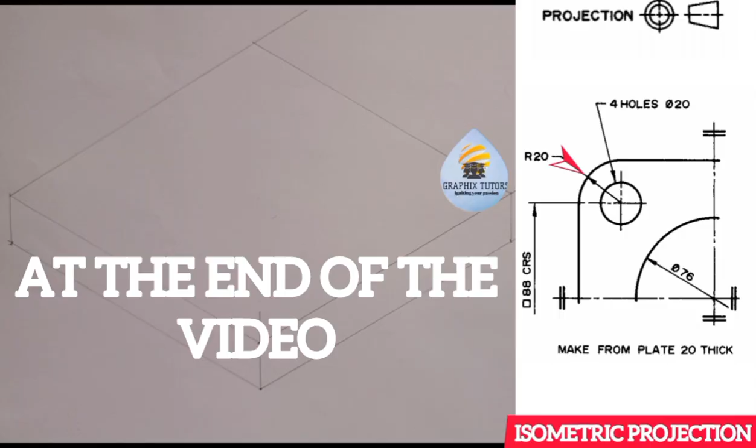My name is Graphics. If you look at the right hand side of the screen, you see a figure, and we are told to reproduce the given figure in isometric projection.

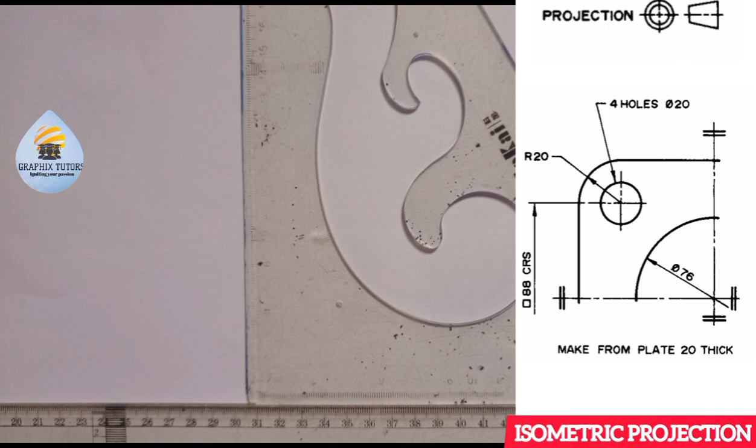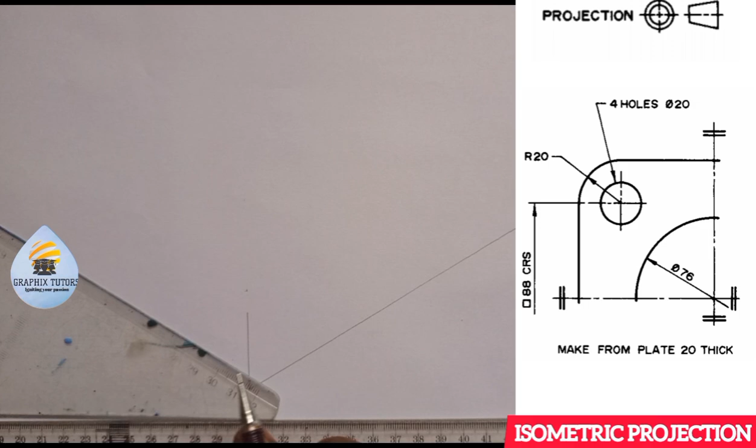Now when you hear the word isometric projection, the first thing you have to do is draw your isometric axis, that is the Y, the X, and the Z axis. Can you see that? Y, X, and Z.

Is that taken? Now if you look closely at the figure, we need to get the length and the width. This symbol you see here, like a center line at this end and at this end, means that this object is symmetrical in all directions. So it means that this figure is also placed here, also placed here, and also placed here.

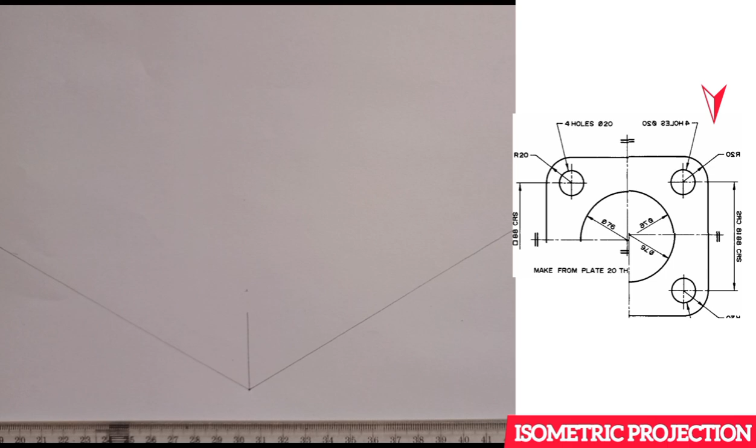I will put them together now, so they only give us one quadrant of it, one part of it. Is that taken, one-fourth of it? So this is one-fourth of it, and there are four in number that are assembled together.

So if you look at this now, whatever I'm looking at, I will assume that it is 2. So we have the radius here, 20, but it's telling us, 20, right? Meaning that at the other end also there's 20 again, making 40.

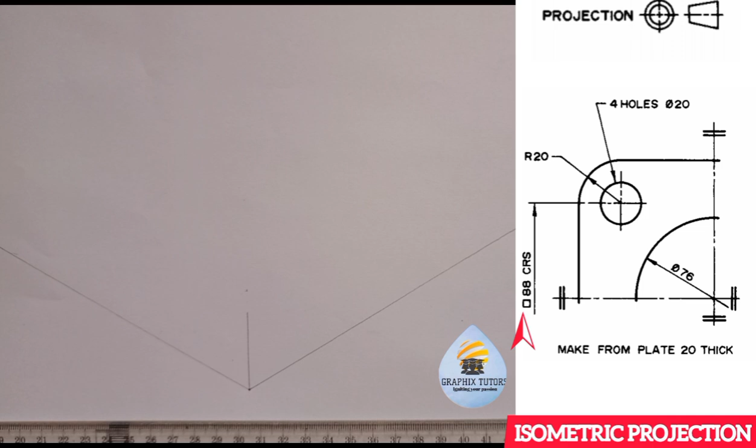Then 40 plus 88. So when you add 40 to 88, we have 128. So the entire length here is 128.

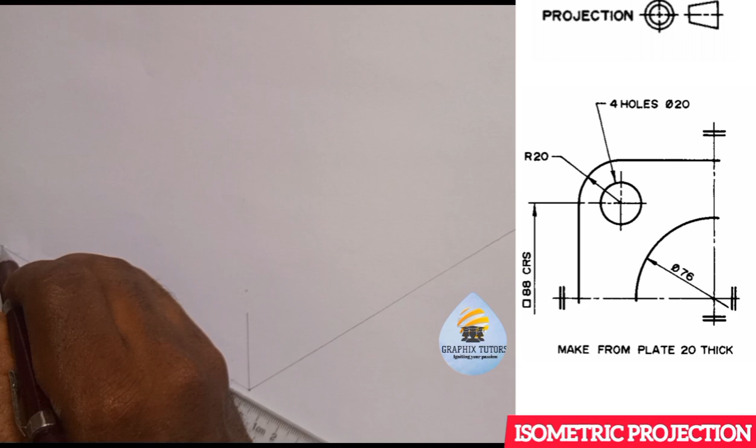128. So I'm going to measure 128 from the side, from 0 to 128 here. Can you see that? From 0 to 128 there.

Now the next thing, whatever happens here will happen here also because it's symmetrical. So I'm going to measure 128 here too, from 0 to 128.

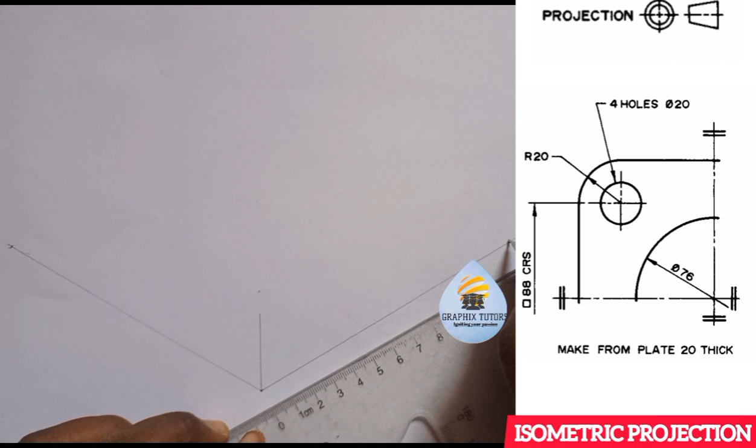And the height, there's a sentence here that says make from plate 20 millimeter thick. That is the thickness, and thickness is the height. So I will measure 20 upward, from 0 to 20.

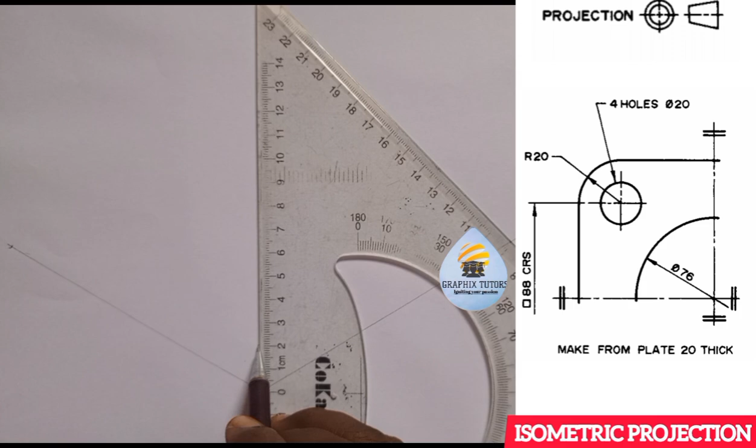This is what we have here. Can you see that? And I will now form the box from it, just like I've been doing in all my previous videos. So I will take this right to the side,

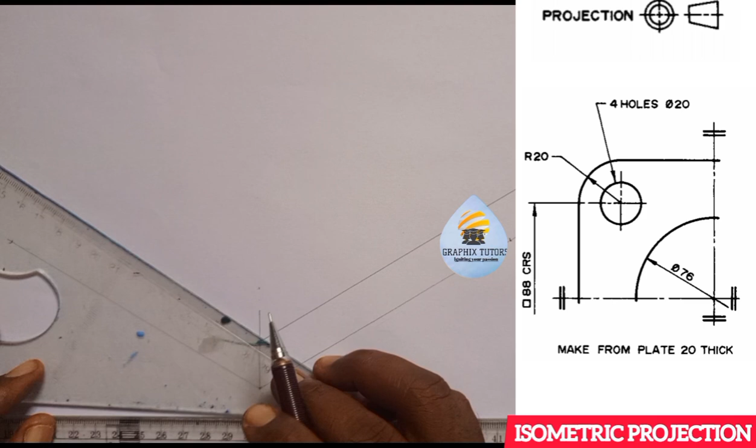and I'll take this to the side, and I will stand it up like this, and I'll also stand it up like this. Close it up too, and I'll close it up too.

Can you see that? So I can easily bring it down if I want to, but let me leave it that way. So this is what we have here.

So the first thing I'll do here is draw in the fillets. Look at what I call the fillet here, this curve here, right? And the radius of each of the fillets is what?

It's 20. Since they are 4 in number, so we have 4 fillets, that is 1, 2, 3, 4, fillet in all directions. So we move further, and in moving further we'll be having this.

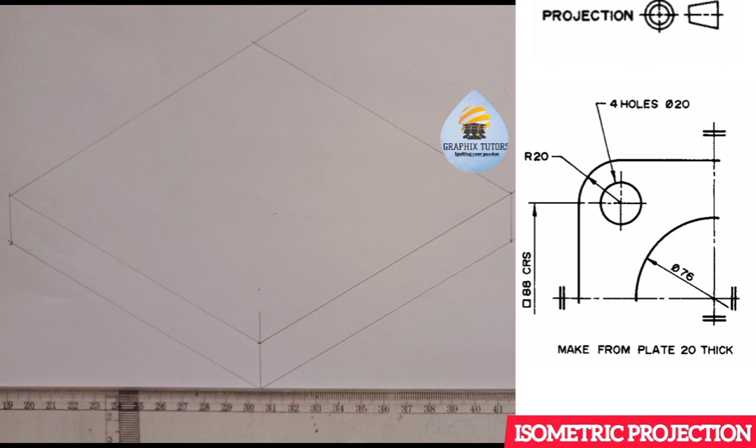So you now measure the radius of 20 on your meter rule this way. Radius of 20. So if I pick it up from 0 to 2 is 20.

Can you see that? And I'll come at each of the ends here, and I'm going to mark 20 here, 20 here. I'll come again, mark another 20 here, come here again, mark another 20 here. I'll do the same thing here too.

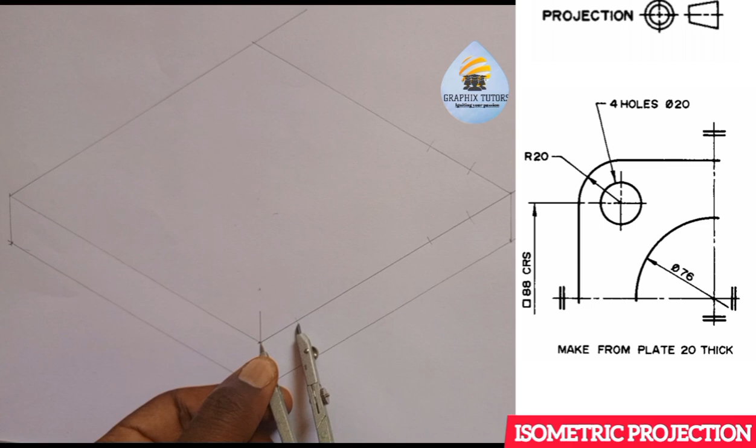20 here, 20 here. I'll come here too, 20 here, 20 here. I'll come here too, 20 here, 20 here.

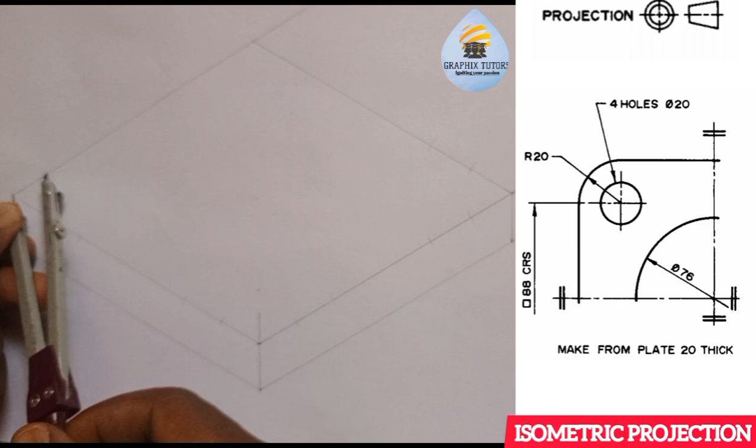Also at this point too, 20, 20. I'll come here too, 20, 20, and also here too, 20, 20. Can you see that?

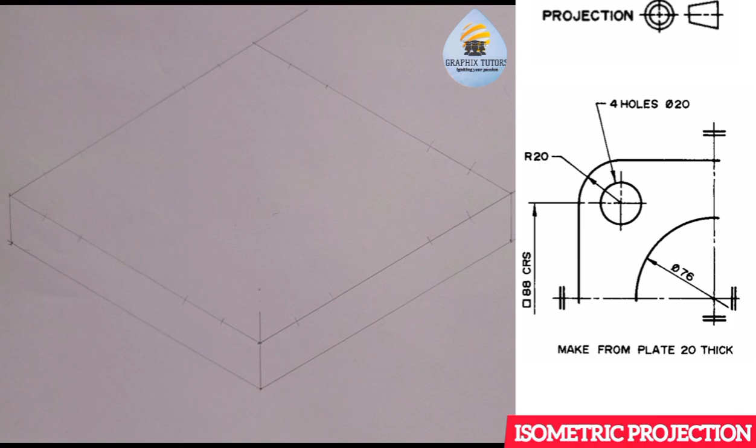Then I'll take my instrument. Let's start with this and that first, since they are opposite each other. Once I use my instruments and I draw a line this way, I come here also, I draw another line this way. Can you see that? Where they meet

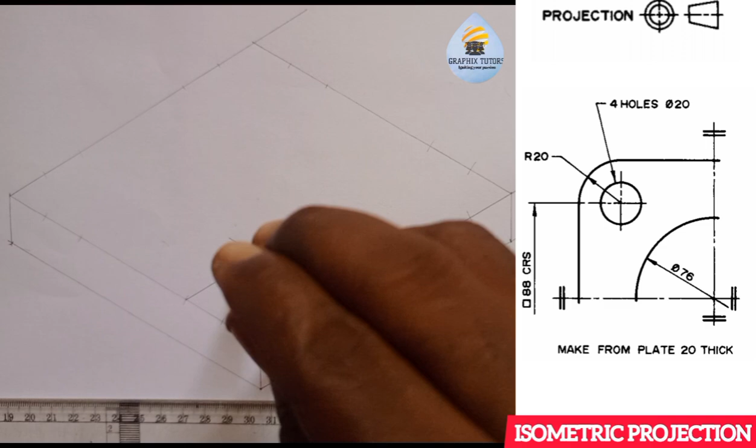is where I'm going to draw my curve, from this point to this end. Hope you can see that. Can you see that?

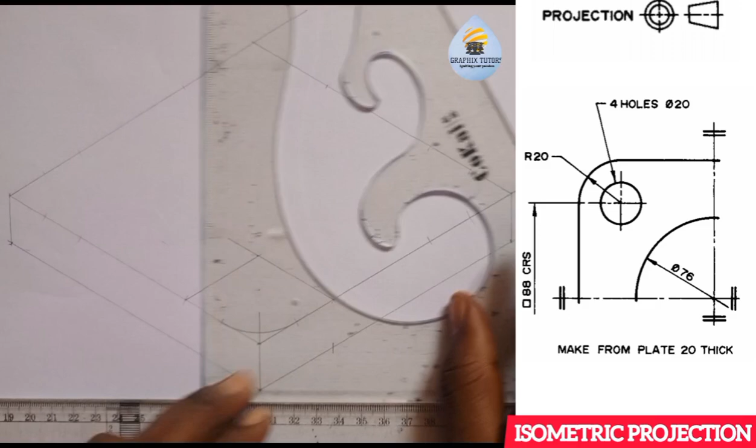Then I'll come down to, I'll do the same thing, just watch. If I come down to, I'll do some here, mark this one down here, come here too, mark this one down here, and I'll join it like this, and also like this.

Can you see that? So when I place it here, I'll do the same thing too. So when I place it here, I'm going to connect it from this point to this point.

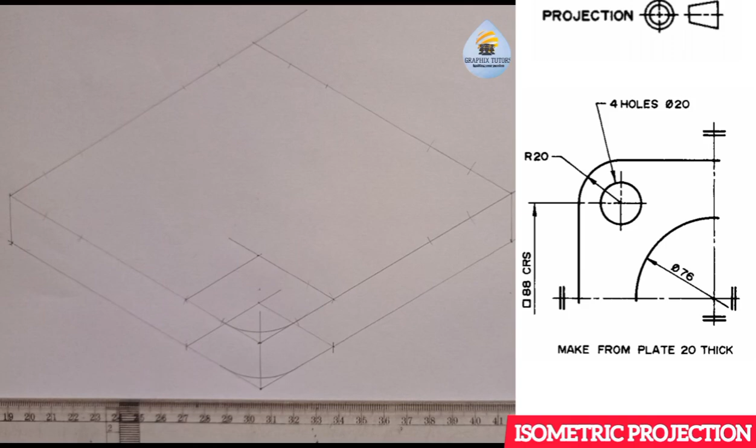Can you see that? So I'm done with this. I'll come here too, I'll do the same thing. Let's see what is happening.

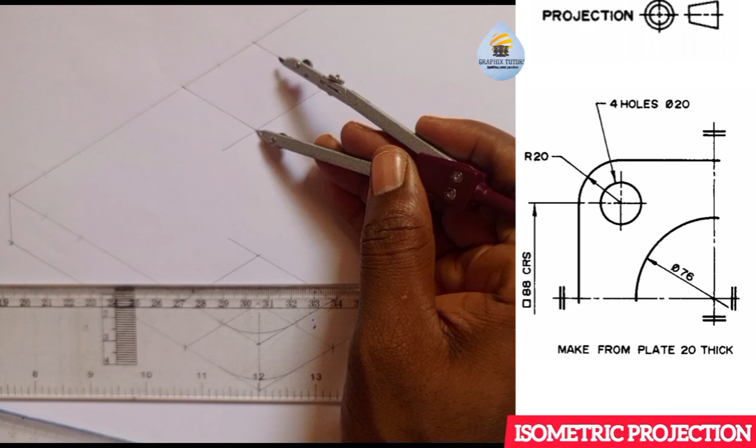Place it on my T-square and I'll connect here to here. I'll also connect from here to here. They are meeting here, so that point they meet. I'll place it at this point and I'm going to connect them this way.

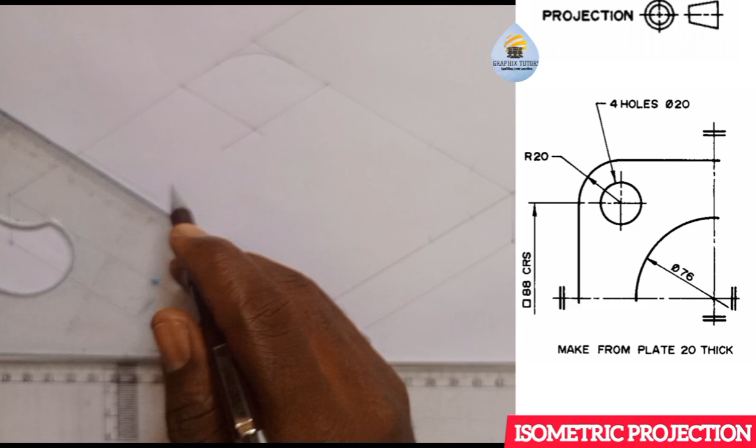Can you see that? Then in this aspect here, what I'll do is the same thing here too. I'll draw from here to this point, and I'll also draw from here to this point.

Then I'll join the diagonals, this way. Can you see that? Then this point you see here, I'll just draw a line from this point to touch this point here. Can you see that? That point to touch here.

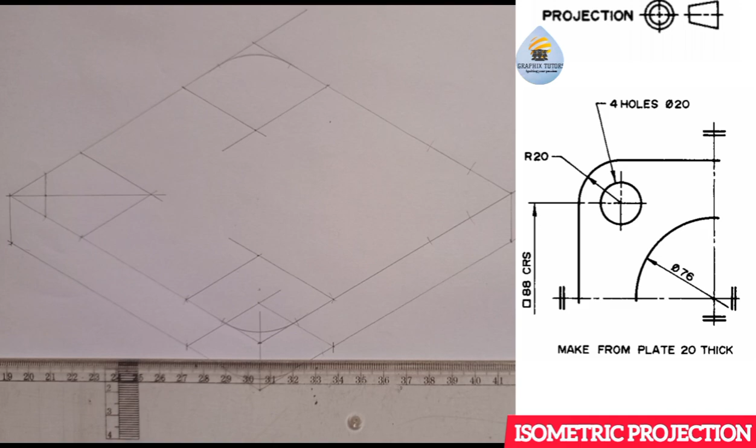So where it meets is where I need for my curve. So when I place it at this point here, I'm going to be having the curve here.

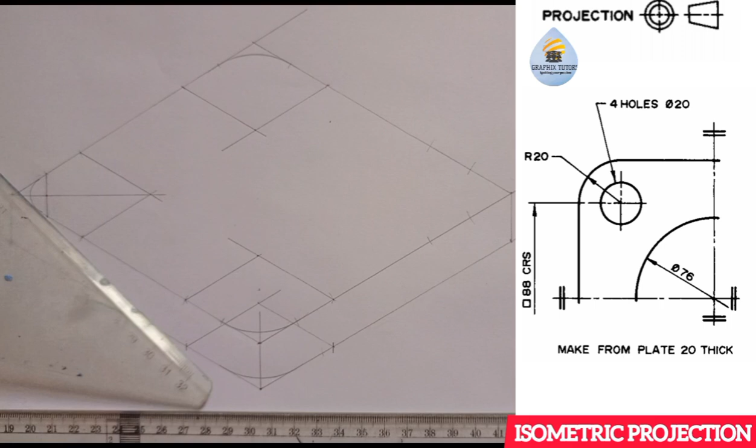Can you see that? So I can easily join from here to this point. Can easily join from here to this point. Can you see that?

Now I can easily thicken here too. I'm coming back, I'm going to thicken it. Let's just move forward and see what is going to be happening here.

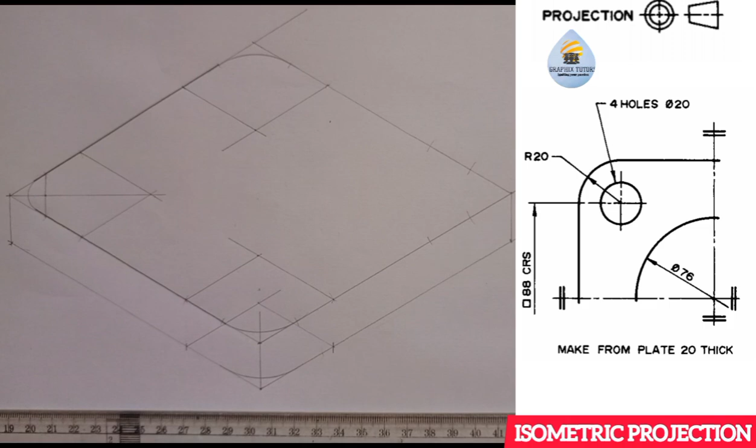So since I've done this, I'll also come here. I'm going to bring diagonals, these two diagonals you see here. Can you see that? I'll just draw this way. Then I'll bring this point, trace it downward.

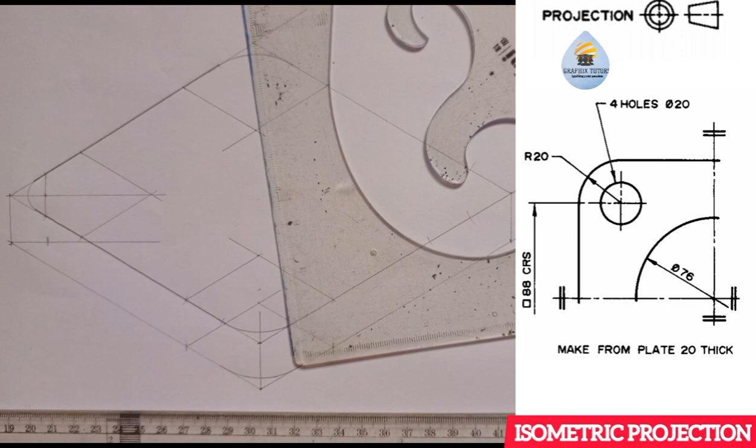Then I'll come here, bring this down, taking it to come down this way. Then place it here to get this.

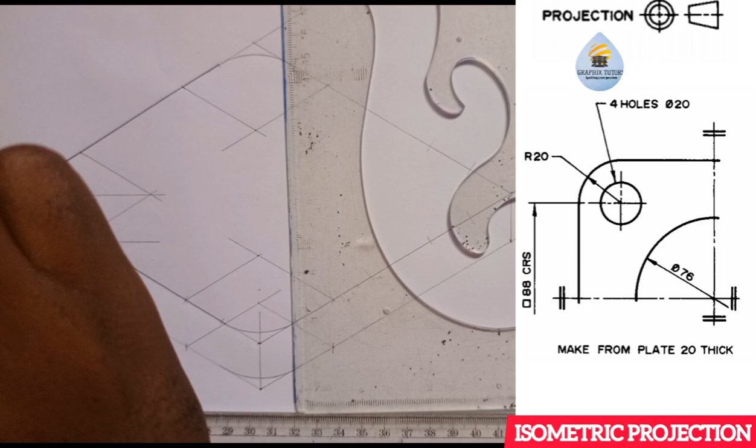I'll stop there, and I can easily thicken from this point straight down. Can you see that? The same thing will apply here too, so what I will do is remember the diagonals.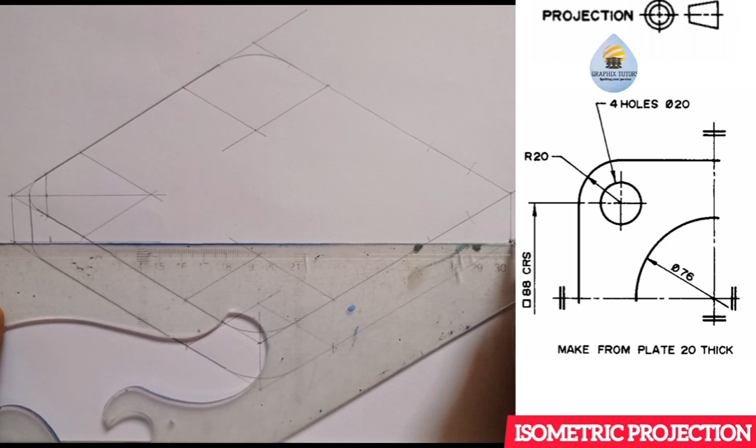So when I draw this out this way, I'll come here too, I'll do the same thing out this way. Then I'll just come and take the measurement from this point to this point here.

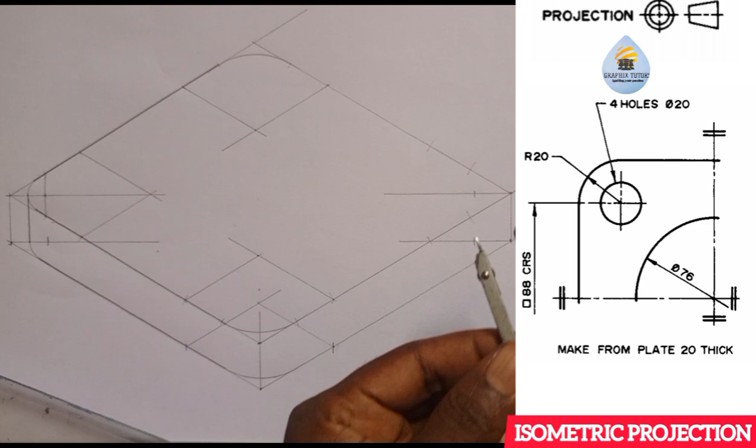I'll come here and I'll mark. I'll also come here too and I'll mark. So these are the points I will use to get my curve, like this.

What I will use to get what? My curve. Sorry.

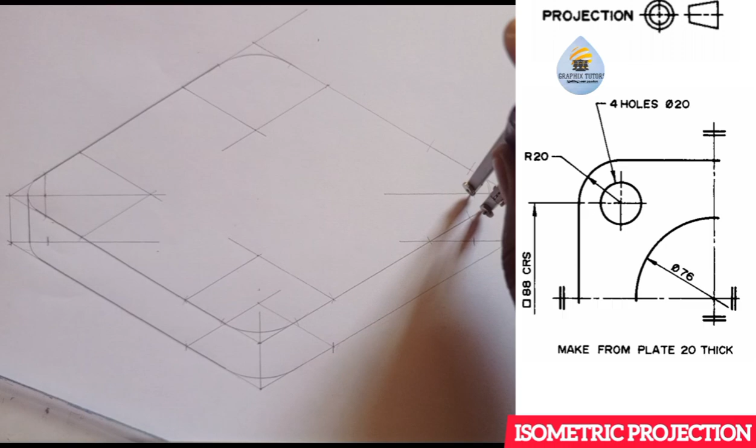That is one. I'll come here too, I'll do the same thing. I'll just bring this one down this way. From this end, I'll bring it down. I'll bring it down.

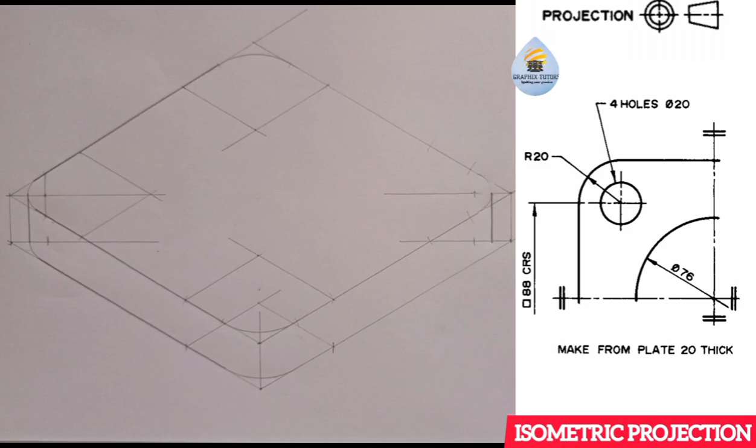Touch here. And the next one from here, I'll just get this.

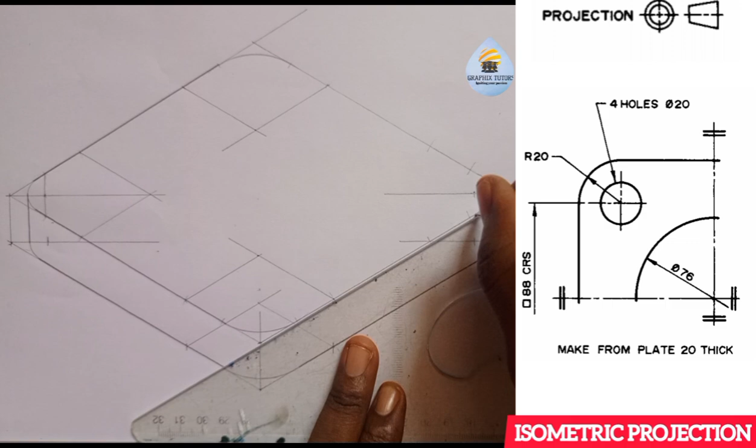So I'll just move from this point, come and touch here. I'll move from this point, come and touch here. Also from this point, come and touch here.

Then I'll thicken this, I'll thicken all this arc out. So that's what we have here.

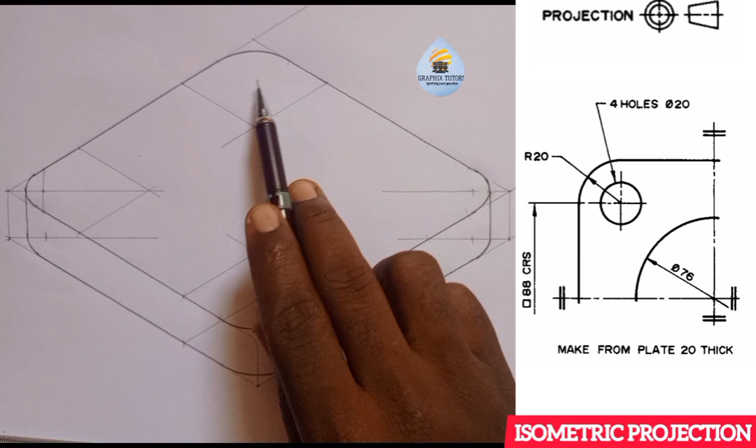Now the next thing is there are circles in between here, and from the question we're told that there are 4 holes, diameter 20. So these are the 4 holes here. So what I'll just simply do is complete the box. This box here is already completed.

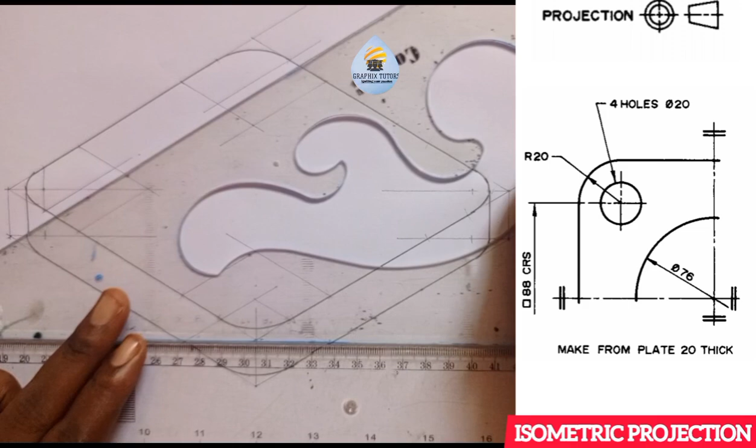Can you see that? The next one is to complete this box too. Where they meet, draw another line.

This one too, I can just do that here. Another line. Here too, can just do that here. Another line, another line, right? And you can close it up.

Right? And close it up too.

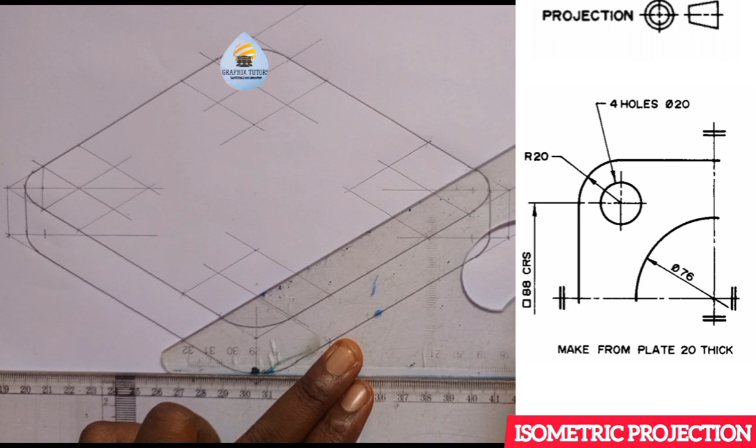They are meeting here. Here are all the points I am going to focus on. You can just complete the diagonals this way for everything.

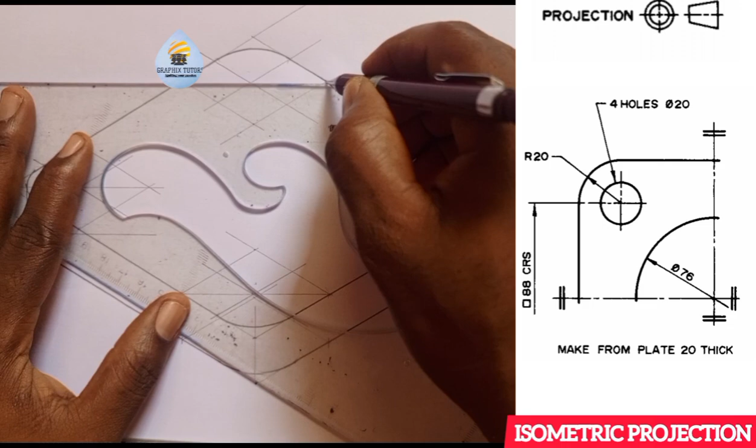Here are the four diagonals that we have. So we have point 1, point 2, point 3, and point 4. So the radius given, diameter given, is given to be diameter 20.

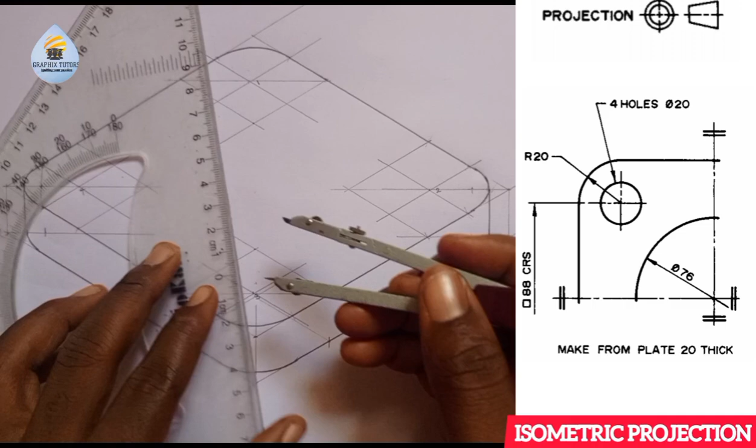So we're using 10, 10 each. So I can use my meter rule and I'll measure 10 from 0 to 10. And I'll place it here. And I'm going to mark 10 in all of them.

10 here, 10 here, 10 here, 10 here. I'll come here, 10 here, 10, 10, 10.

Come to the center too, mark 10, 10, 10, 10. Come here too, mark 10, 10, 10, and 10. So you use them to form a box.

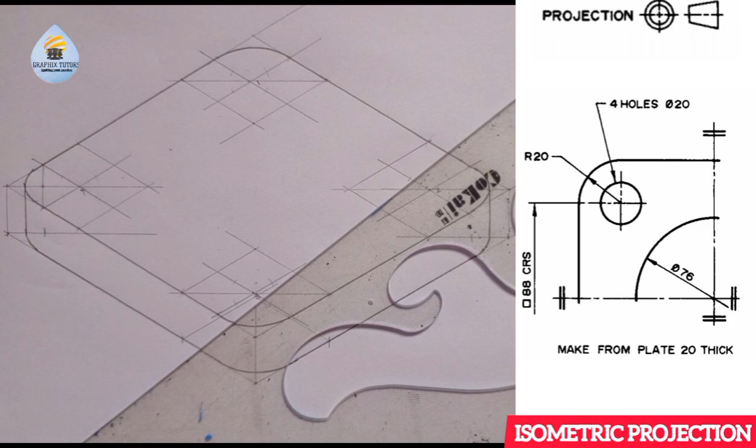So if you use them to form a box, I'll be having this. So from each of those points here, like this point, I'll just draw a line this way. This point too, draw a line this way. I'll come here, I'll do the same thing.

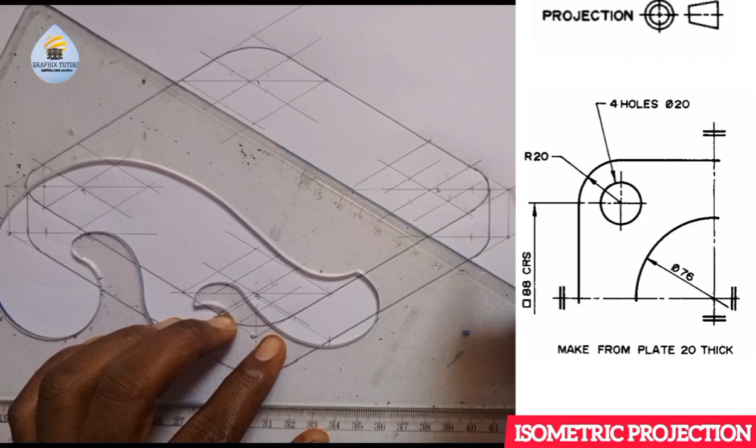Draw a line, and I'll close it up. Close all of them up. Here too.

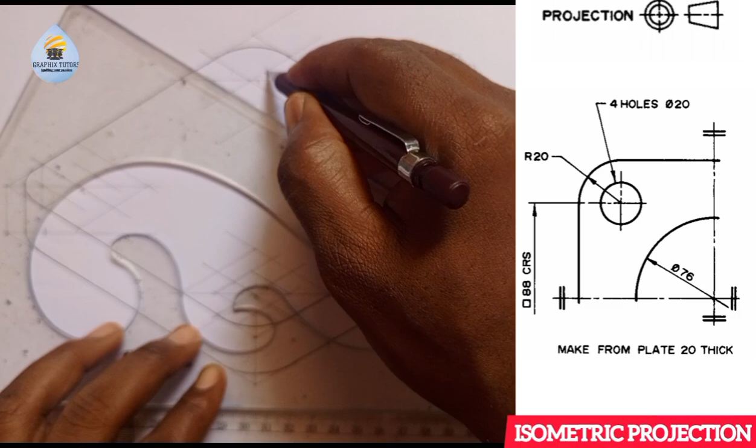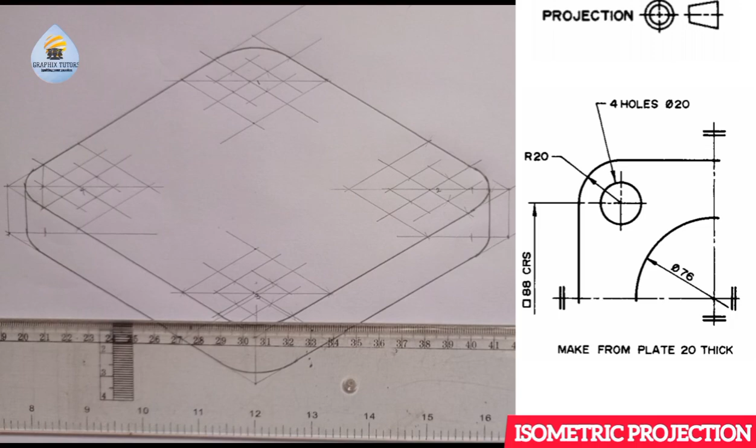Can you see that? So it's in this box here I'm going to draw in my circle. Just remember, you can take any of these corners, and you join from here to this, and you join from here to this. You come here, you join from here to this, and you join from here to this.

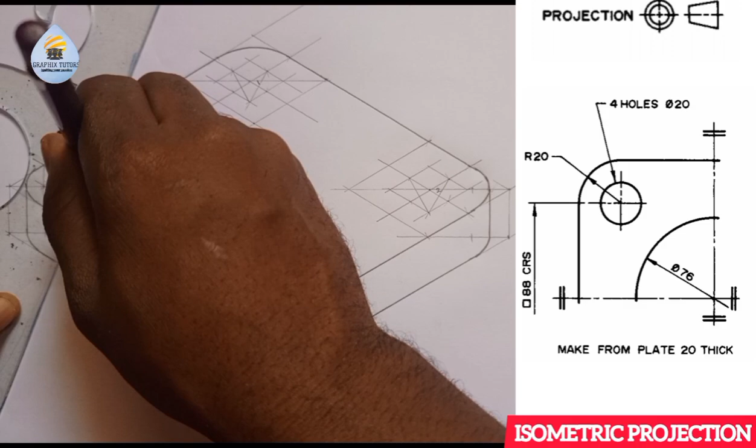You come here too, you join from here to this, and you join from here to this. Here also, join from here to this, and you join from here to this.

So they are all meeting at this point here, where the diagonals I'm drawing meet. The diagonal here will be the point I need. So you can see that where diagonal meets.

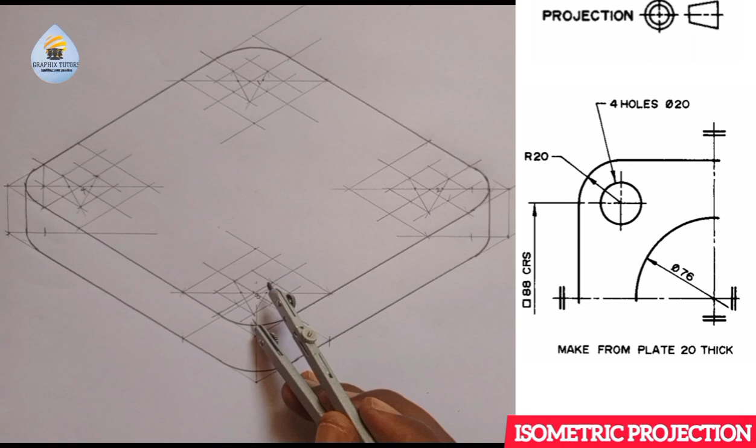Now I'll take my compass. I'll start from here, so this is what you do for everything. At this end, you can come here, you draw your circle.

Can you see that? You turn it the other way around, place it here too, and do the same thing. You come here too, place it here, you do the same thing.

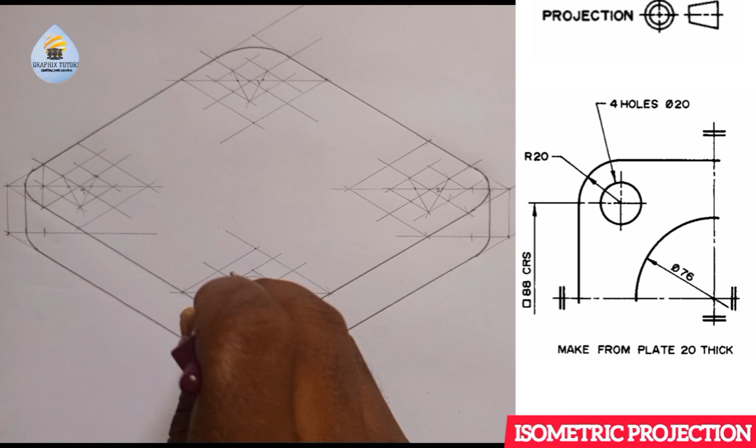Come here, you do the same thing. So once you've done that, you thicken it out. Let me thicken it out. This one you have, you come here too, you do the same thing. Do that for everything, so I'll be doing that.

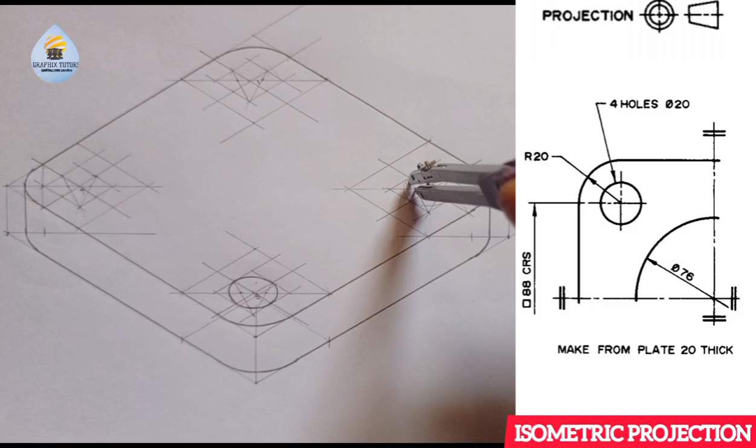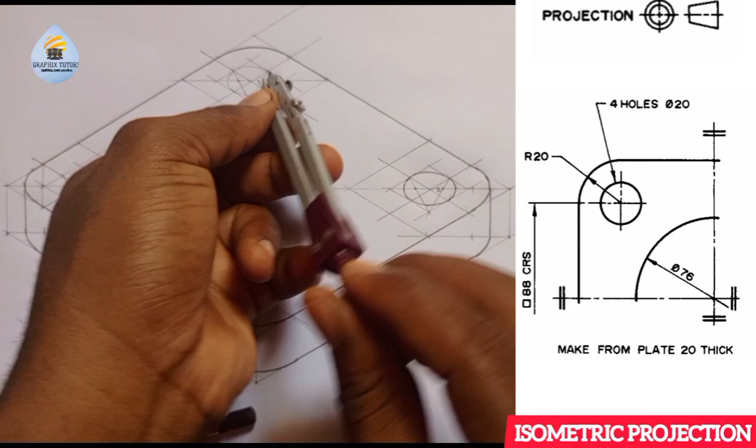Go to the next one. In here too.

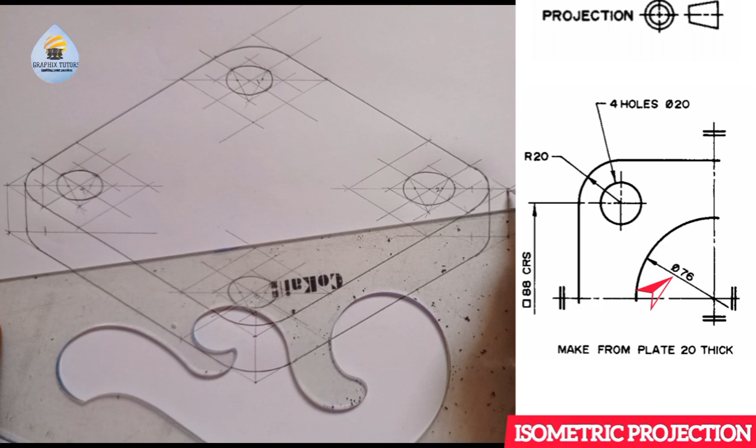So taking that out, that's what we have here. Now if you look at the diagram very well, there's another circle in here. Can you see that? And that is the diameter of 76. So what I'll do is join the diagonals from here to here, complete it out there, and also the diagonal from here to here, I'll just take half of it. So where it meets here, that is the center of this figure.

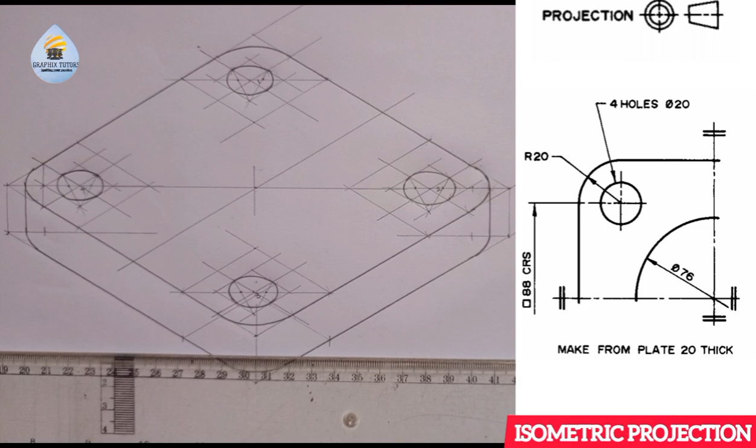I'll take my set square and join it, passing through the center. So that is what I need, this point here. So once I've done that, I'll now measure half of 76, which is 38, on my meter rule this way, from 0 to 38.

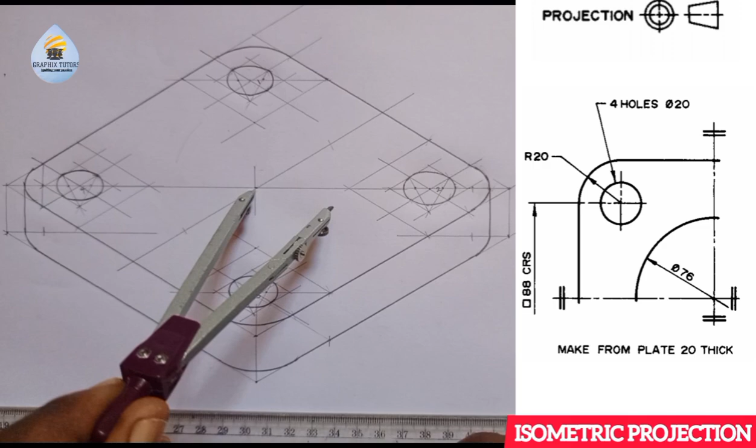So if I place it here, I'm going to mark 38 here, 38 here. Also I'll mark 38 at this side, and also 38 at this side. I've not drawn that line, so I'll draw it now. I'll draw another line that passes through the center in this manner.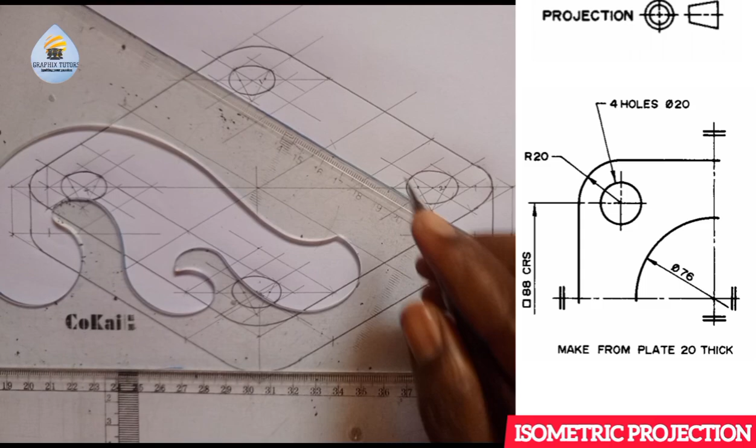So you see that this is where they are meeting. So I'll form the box on that. I'll draw this box this way. I'll come here too, I'll do this way. I'll come here too, I'll do this way. And I'll come here too, I'll do this way.

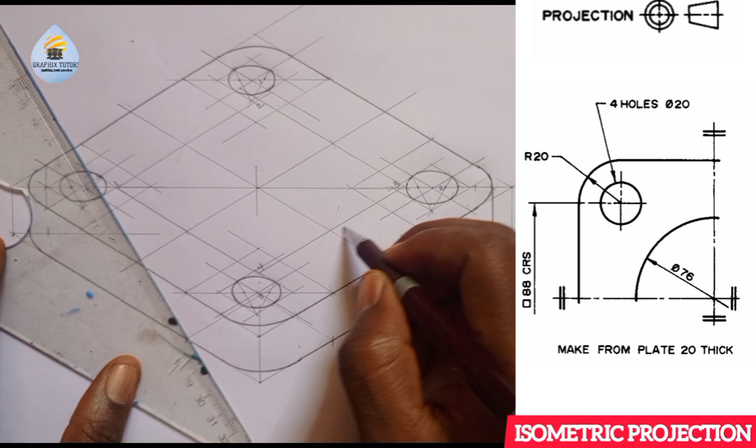So this is where they are meeting. They're meeting at point 1, point 2, point 3, and 4. So from 4 I'll draw a diagonal, moving from here to touch here. Can you see that? Another diagonal moves from here to touch here. So where they meet here, that is where my circle will be placed.

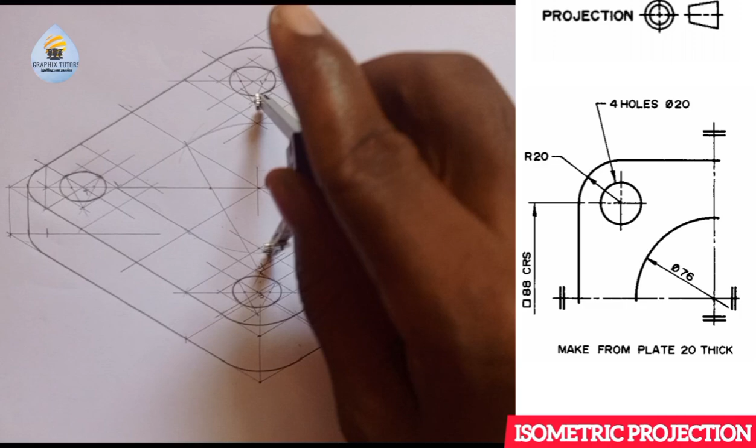So when I take my compass, I'll place it at this end of 4 and connect between this point to this point. Hope you can see that. I'll come to 2, do the same thing. Let's do that properly, from here to this point. Can you see that?

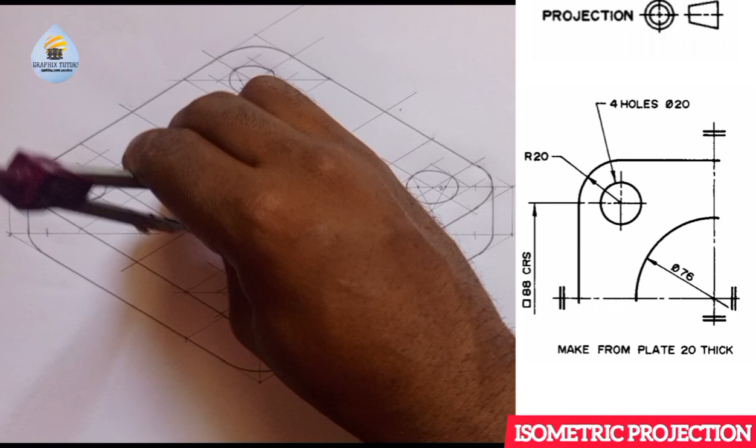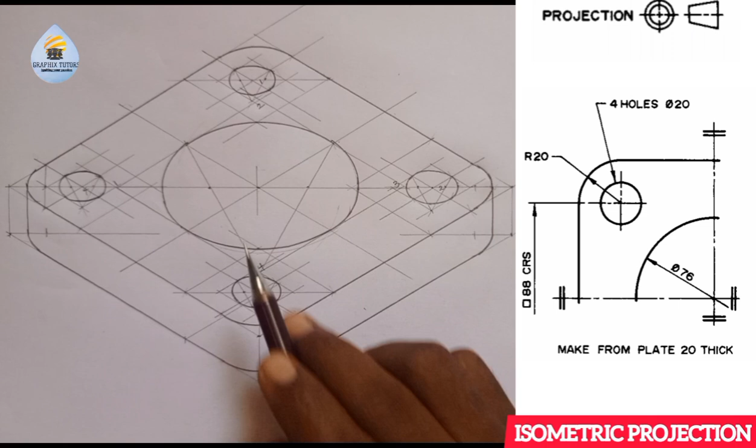So then from here I'll get this. Then from here I'll get this. So I'm taking this out. So this is what we have here. And there's another one under here. So what you simply do here is this.

You take your compass at this end here of 2, and you just draw it down this way. And you measure the thickness of the 20 earlier, which is this, and you place it at that point and mark it down here.

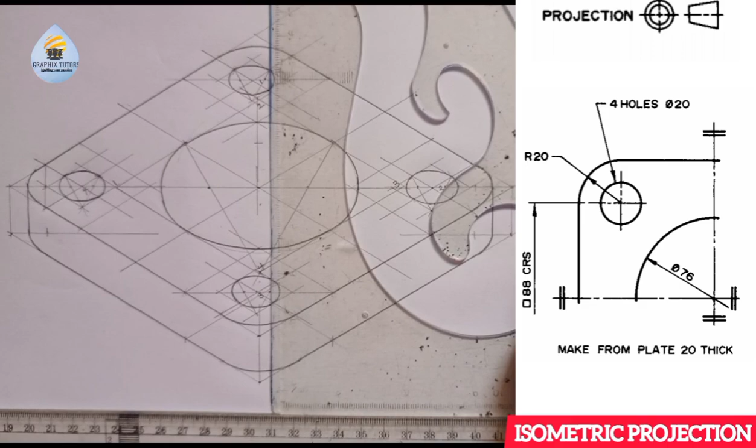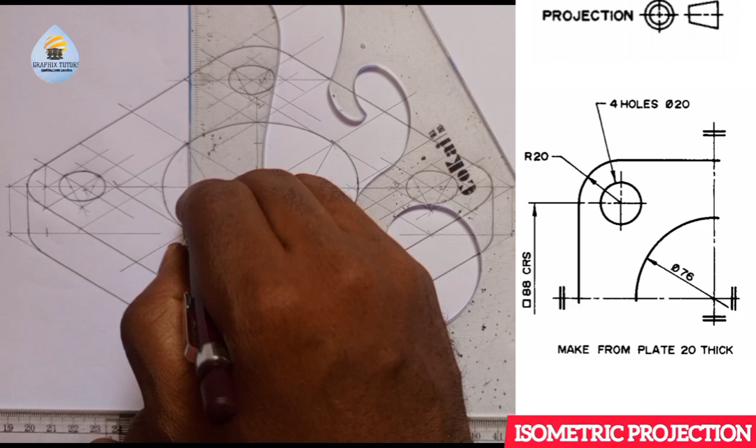Can you see that? So once you've done that, you come again to this point here of 4, draw another line that will go down of that 4. Then you measure the same 20 that you measured from here to this point. You measure it from that 4 downward. So from that 4 here now, you take it to this point here, come to measure 20 downward here, and come here to measure 20 downward here.

So this is where you measure your 20. So this is 20 here. And I'll come here, this is another 20. Then this is another 20. So this one I'll now place here, take it to this point, and I'll draw an arc to come and touch this.

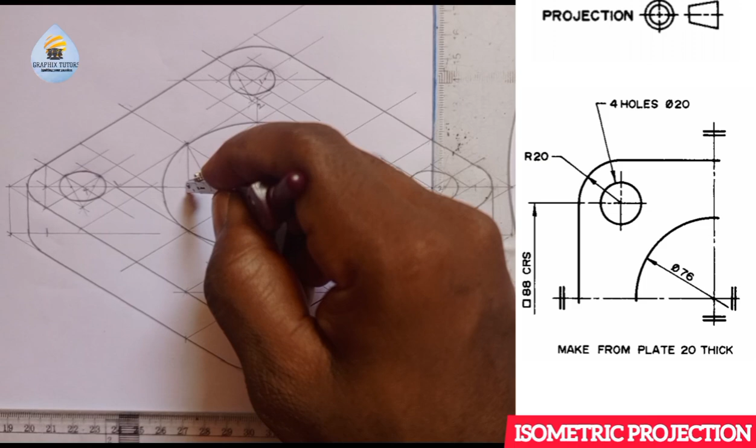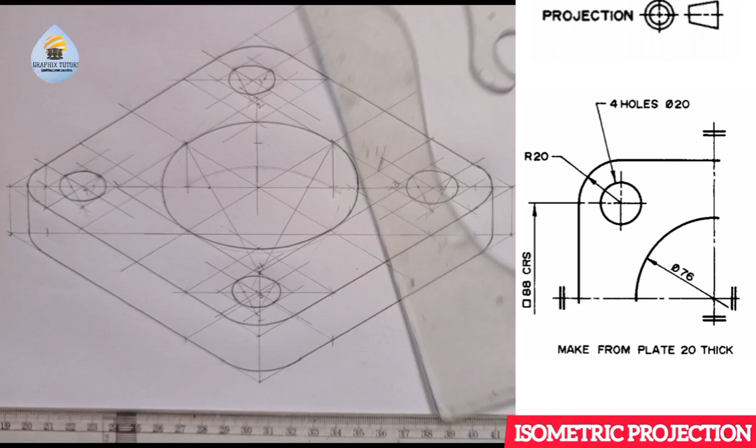Can you see that? Come and touch this. So I'll taking that out, but let's just proceed with the rest. So if I should draw this, change the diagonal to the diagonal, if I complete it like this, I'll transfer this point, this arc here, this point here, I'll mark it on this line, I'll mark it here too. I don't want to redo the point from the beginning, that's why I'm doing it this way.

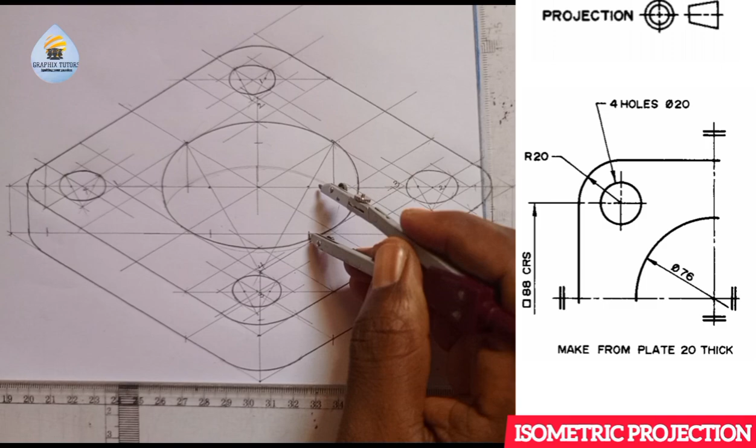So when I place it here, right, I'll take it here, and I'll just stop here. And I'll place it here too. Here, I'll put it here at this point, then I'll stop here. So let's take that out. So this is what we have here.

I have successfully drawn out the plate, right? The plate has 4 holes. Sometimes they use these holes for screwing it on something. This is what we have here.